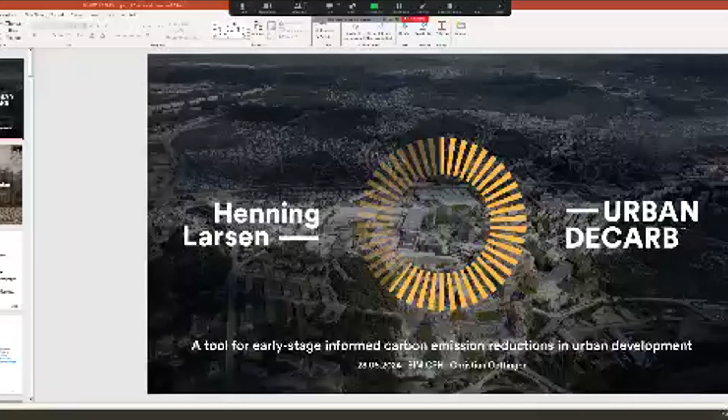Yeah, so my name is Christian Oettinger. I'm a design engineer here at Henning Larsen in the R&D team here at Vesterbro in Copenhagen. I've been here for roughly around 3 years, where this Urban Decarb tool has really been one of the things I have been working a lot on over the last couple of years.

So thank you for joining this session, first of all, on the Urban Decarb tool. And I think I will dig into the details and all about Urban Decarb, but here in the beginning, I'll just give a very brief introduction to what Henning Larsen is, if you don't already know it from David.

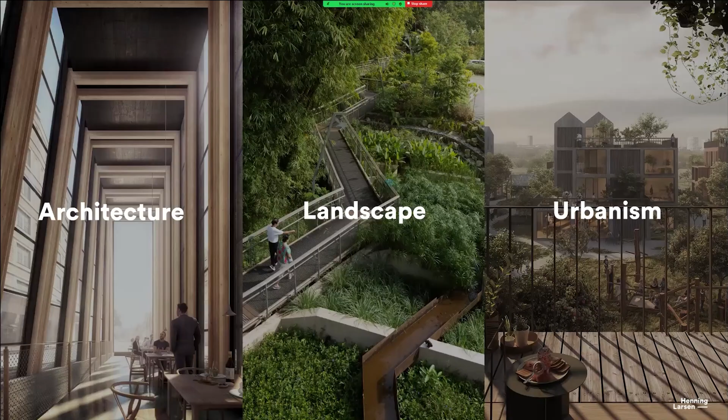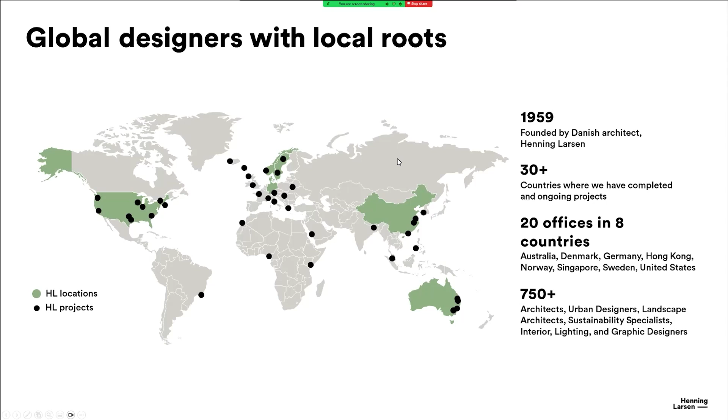So Henning Larsen is an architecture, landscape, and urbanism studio. It's a global studio founded in 1959 by Henning Larsen. And it's global in the way that we have more than 30 countries where we have completed or ongoing projects. And then at the same time, as you can see with the green ones here, we also have offices all over the world.

We're also part of the Ramboll Foundation, and that is important in this case with the Urban Decarb tool here, because that's really why we can even develop a tool like this. First of all, to get the funding, the hours to develop the tool, but then second of all, also to harvest all of this information, all of this data, and all of this expertise from all the people within Ramboll when it comes to all different engineering services that you need to integrate into a tool like this one.

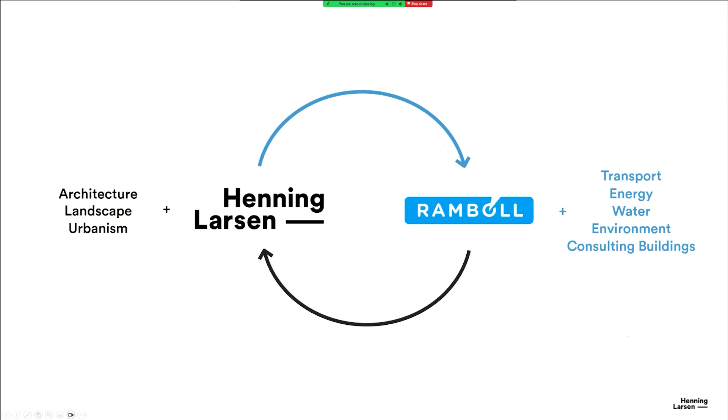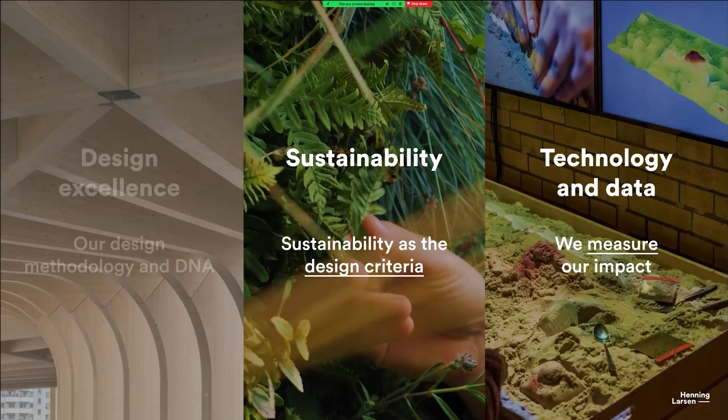Then in Henning Larsen, we have these 3 kind of design topics, design KPIs: first of all, design excellence, sustainability, and then technology and data. As I'm sitting in the R&D and more on the engineer side, I will focus on these 2 here today, about using sustainability as a design criteria, but then also how to measure our impact with technology and data.

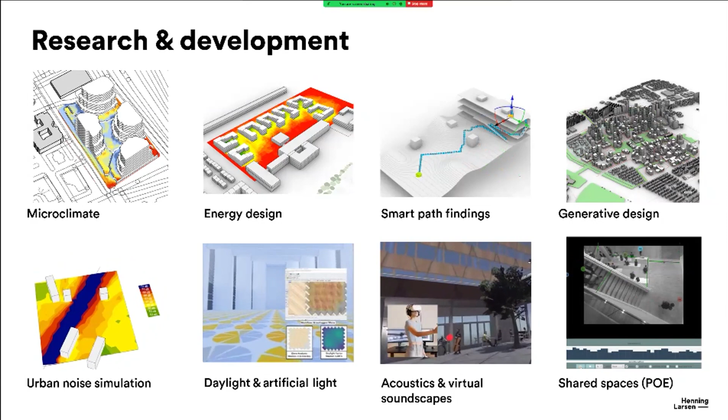So here's a bit about how we work and what we have developed in the R&D team over the last couple of years. It's everything from tools that can run microclimate, energy design, generative design, noise simulation, daylight, acoustics, etc. We have this kind of experience in developing tools or using already existing tools on projects here internally in Henning Larsen.

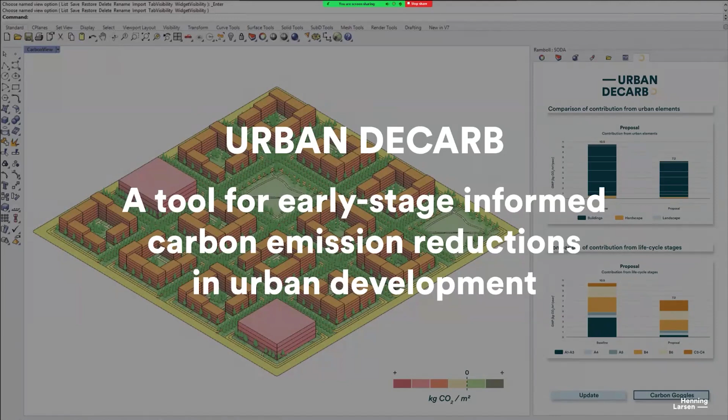And then the latest one of these is the Urban Decarb tool. So in very short, Urban Decarb is a tool for early stage informed carbon emission reductions in urban development. I will try to keep this introduction on why we even built it in the first place short, because I think it's important to explain why we're trying to create tools like this.

First of all, there's going to be a lot more people in cities in the future, 2.5 billion more compared to now, by 2050. At the same time, cities are responsible for a large part of all of our global carbon emissions and a large part of all of our natural resources. And that's why Antonio Guterres, the Secretary General of the UN, said that cities are where the climate battle will largely be won or lost. So that's kind of setting the scene for why we even started creating this Urban Decarb tool.

There's also something about there starting to be a lot of regulations, LCA, carbon assessment, putting in limit values. As some of you may know, last year Denmark introduced LCA requirements and limit values into our building regulations. Actually, a few weeks ago, they made them even more strict from next year on. And if we look at other countries, especially here in the Nordic region, other countries are also starting to implement similar building regulations.

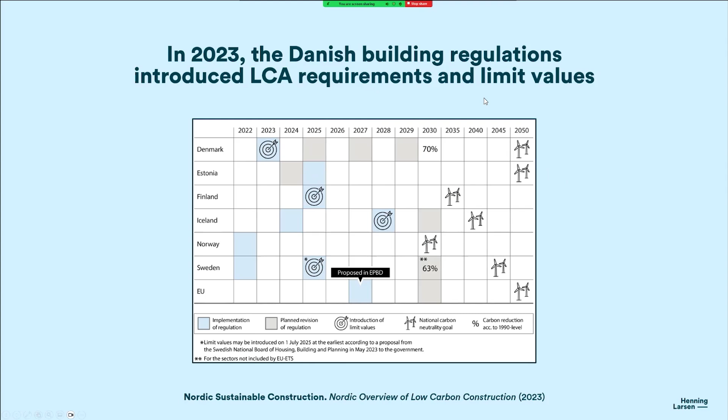Then there's also, of course, the mobility behavior of cars and public transportation, and then below ground also utilities. So instead of only looking into LCA requirements for buildings, we're actually trying to extend the scope and include more categories into the urban scale carbon assessment with the tool.

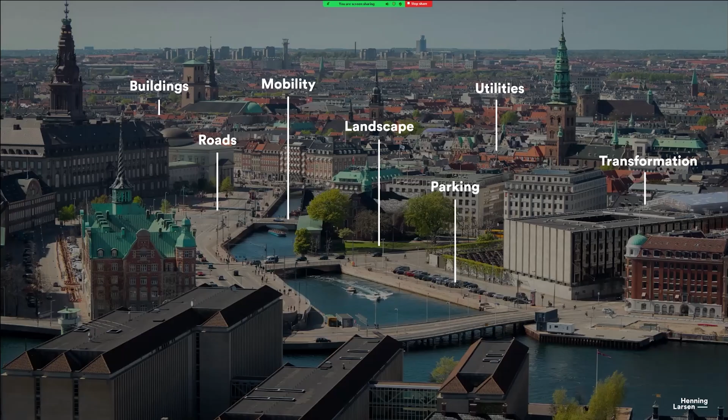So that's the overall goal of Urban Decarb: to make carbon emission data available for informed choices in early stage urban design, in order to minimize the environmental footprint of projects.

In order to do this, this Urban Decarb project has been a research project where we have tried to create a methodology, because there is no common methodology for urban scale LCA as there is with buildings. We have listed these research questions here.

So the first one is, what are the most carbon intensive parts of urban areas? Because when you work on such a scale, it's really the law of the big numbers, trying to figure out what are the most intensive parts first, and then we focus on that, and then include all the other stuff afterwards.

Then it's about where we can actually find all of this data for the urban elements, because if you have ever worked with any kind of LCA assessments, it can really be tricky to find the data. So that has been one of the challenges with this project. And then in the end, how can we actually use this to then design?

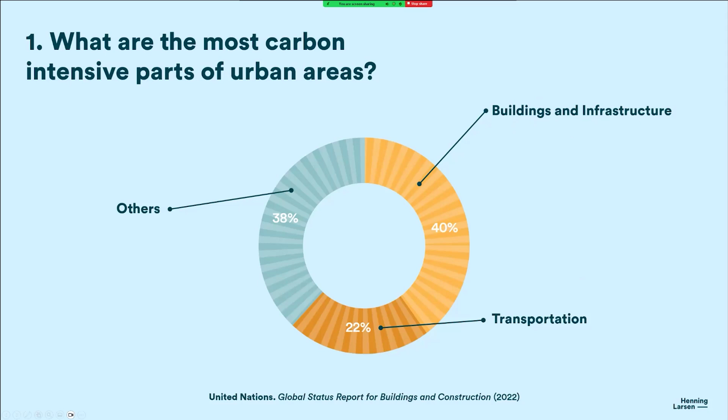So starting with the first question, what are the most carbon intensive parts of urban areas? We looked into this global status report for buildings and construction by the United Nations, where they took all global carbon emissions and divided them into sectors. Very overall, they divided into three sectors: 40% of all global carbon emissions comes from buildings and infrastructure, then 22% comes from transportation mobility, and then there is this 38% from others.

And if we dig a bit more into what it actually includes, for buildings and infrastructure, it's both the embodied carbon emissions as well as the operational carbon emissions. It's everything from all of the building materials, hardscape materials, landscape and green area materials, and then infrastructure materials. And then on the operational carbon, it's both the building energy, but also the public energy around.

And then there are also the mobility carbon emissions coming from both the daily mobility where you drive around or take a train and use some fuel or electricity, and then also the actual vehicle manufacturing that's included in this category. And then there is this whole others, quite broad category, which includes both food and aviation and what clothes you're wearing, what TV you're buying, etc.

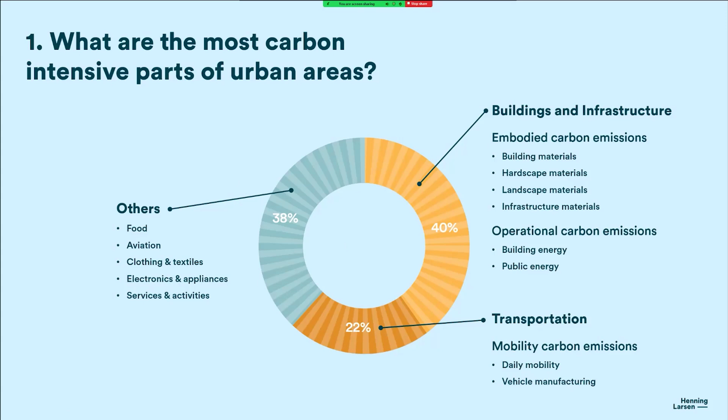And when we started out this project, we tried to set our scope and figure out where we could really make a difference when we did these urban master plans. So we said that our sphere of influence as urban designers is really on this buildings and infrastructure part and on transportation, and that is what is within the scope of the Urban Decarb tool and what we're trying to really integrate within this tool.

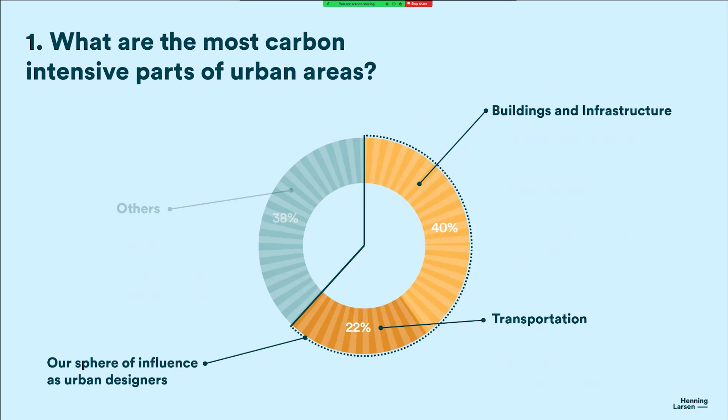And then we took these two sectors and divided into a few more categories. So first of all, the category called buildings, both on materials and energy, but then also the open spaces, everything from roads and sidewalks to parking and green spaces and parks. And then all the stuff below ground, all the networks that goes into, for example, all the buildings, including electricity and water and district heating. And then the category called mobility.

As you can see here, there are some of this we actually got quite far with already in our tool, which is fully implemented within our Rhino Grasshopper workflow, which is all on the buildings or open spaces. Of course, it can always be more detailed, but we got quite far with this. And then we are working quite intensely on integrating networks and mobility in the tool, and already figured out a methodology, and now just trying to see how we can actually implement it.

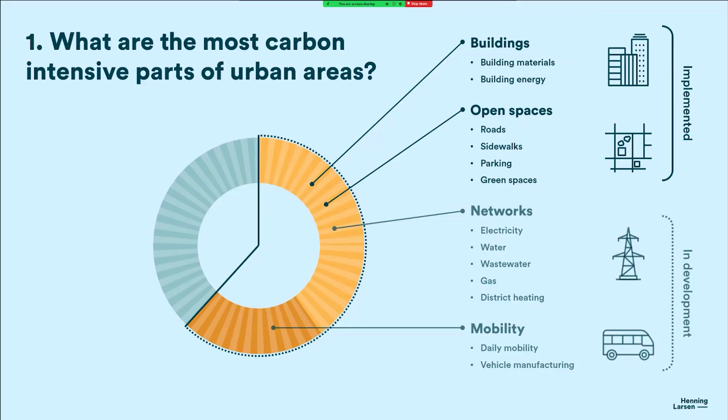Then next question: so where can we find the carbon data?

If we look at the same categories as we saw before, when we prototyped this tool, we have been working specifically for Danish projects, and that's also where we have used the project or the tool the most on projects. So for the buildings, we have looked into Danish EPDs as well as the Ökobaudat database, which is kind of like the standard in the Danish building regulations.

And then for the open spaces, we have dug into this database called InfraLCA, which is made by Vejdirektoratet, the Danish road directorate, where they created a database for LCA numbers for all different kinds of infrastructure elements. And then we're also using this database called Climate Positive Design in order to figure out carbon sequestration rates, for example landscape and trees and stuff like that.

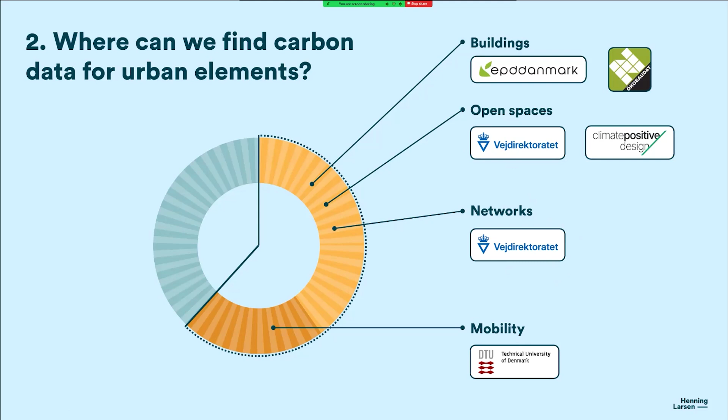And then if you look at networks, that's also something where we're looking into InfraLCA and using the same database here. And then for mobility, we are looking together with Ramboll's mobility department into various kinds of transport survey data sets, for example one which is made in Denmark specifically by the Technical University of Denmark. So that's overall where we get the data from, and I'll be a bit more specific on how it works a bit later.

So then there's also the question about how we actually estimate this urban carbon footprint, and we're using this methodology which is called bottom-up LCA. Essentially what bottom-up LCA means is that the sum of the carbon footprint of the urban area is the sum of all its elements and various parameters that go into the urban area. The urban area here consists of some mobility, some networks, some open spaces, and some buildings.

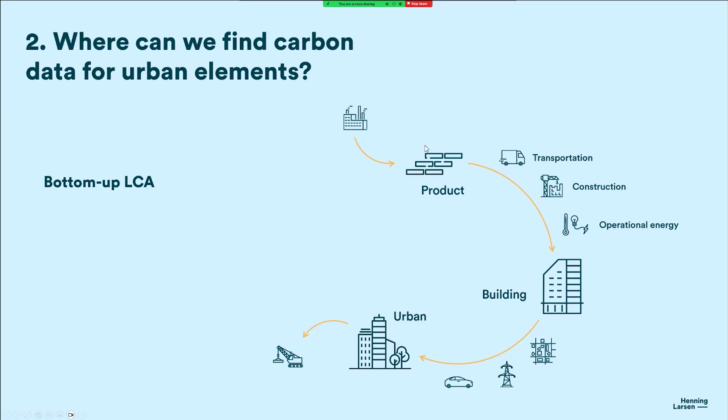And then if we take buildings as the case, then all of the buildings consist of some operational energy, some construction emissions, some transportation, and then a bunch of products which we can find EPD and data sets on. And if we take all of this up, then we can actually find the total urban carbon footprint, which is the sum of the impact from each of its elements.

And that also means that when you work with it here and you sit and choose between different scenarios and different materials, the carbon footprint is actually directly determined by those design changes that you make. So for example, if you change a facade or you edit your window to wall ratio, or you make your building slightly taller, then it will directly influence the quantities and therefore also the total carbon emissions.

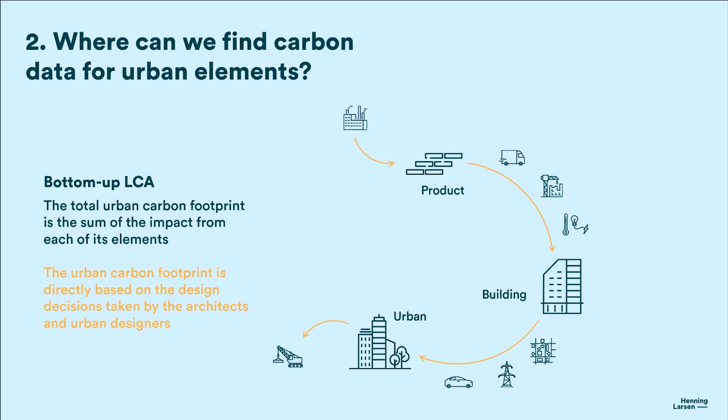This is a sketch of the overall workflow for how we perform the LCA calculation. First there's a lot of quantity extraction, figuring out all the quantities, and then we match that with a catalog of standard components.

Starting with quantity extraction, we're using a parametric workflow in Rhino Grasshopper, where you've often created building massing, volume, urban models where you do your roads, landscape overall, and buildings.

We're running a simplified quantity extraction, meaning there are direct and indirect quantities. Direct ones could be directly finding the area of the ground floor or roof. Indirect ones are, for example, getting the facade area and inputting a window-to-wall ratio to get your window area. That's the simple quantity extraction we built in this Grasshopper workflow to estimate everything from the building massings.

For the structure, which can be difficult to estimate this early in a project, we're using a tool created by Ramboll Finland called Phoenix. What it does, and I'll show the tool in action later, is take your building and split it into floors, then run the geometry and lay out the grid.

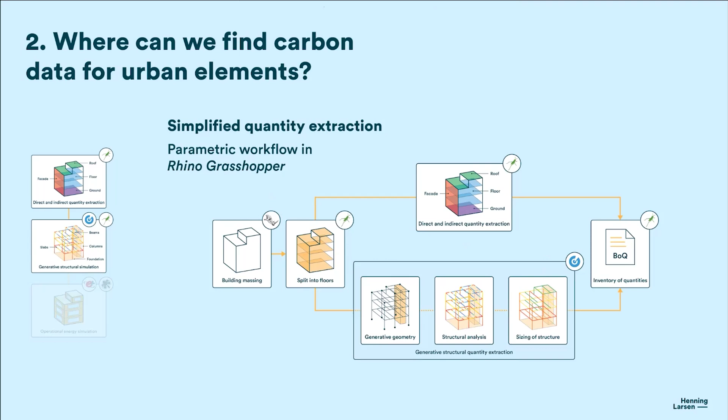Then it performs a structural analysis and sizes your structure depending on very simple inputs such as your building massing and a few details on materials, typology, loads, and so on, then runs through all your buildings and estimates the structure.

We're also running an operational energy simulation using a tool called Dragonfly, which is part of the Ladybug tools integrated into a lot of Grasshopper workflows, and we're utilizing that for our operational energy simulation.

There are a few simplifications when working on an urban scale like this, because running a simple energy simulation for just one building can be very time consuming, taking multiple hours. In this case, we want to get immediate feedback, or at least as fast as possible.

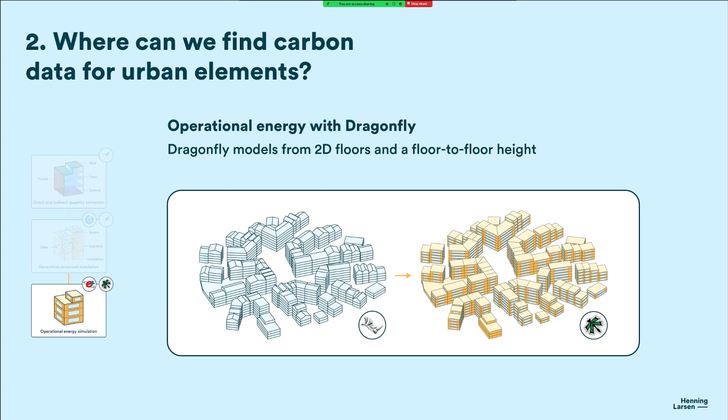Dragonfly models all your buildings from 2D floors and a floor-to-floor height, so it can't take into account steep roofs - it just finds an average height of the top floor. It also models the window-to-wall ratio as one large surface. So there are simplifications, but instead of an 8-hour energy simulation, we can do it in 5 minutes on a project like this.

Once you've found all the quantities and run the energy simulation, we use what we call our catalog of standard components. Normally in building LCAs you'd go in and define your insulation, final facade material, interior material, etc. In this case, we created a component catalog consisting of generic buildups.

We took inspiration from this example library for LCAbyg, created by Build, the Danish institution that also created LCAbyg, the normal LCA tool for buildings. We took inspiration from that, modified it a bit, and created this component catalog.

As you can see here, there are 7 different types of exterior walls you can choose from, same with columns - you can choose from various structural systems and slabs. For roads, infrastructure, and landscape, you can choose from 7 different roads and a few types of lawn or intensive landscape. So we created a whole catalog.

This catalog is then matched with all of the LCA data. So when you click on a timber frame wall, you get the actual carbon footprint of 1 square meter of that wall, depending on the LCA settings you set at the beginning.

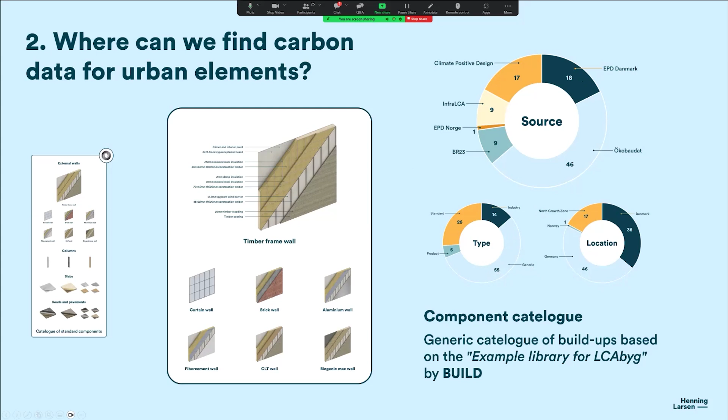Since we're working at these really early stages of urban design, we're focused on finding as much generic data as possible, because we don't want to be specific about products or choose manufacturers. So we're working with generic data from EPDs and from Ökobaudat, as I explained earlier.

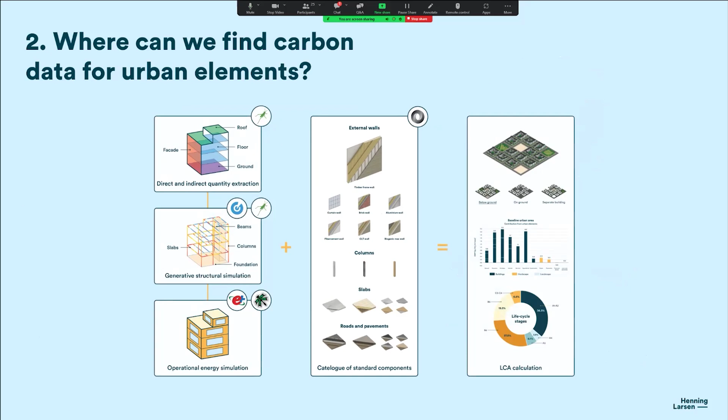Once you have defined all of that, then you have your urban carbon assessment where you can do all different kinds of various scenarios. And then in the end, how can we actually use this carbon data to design urban areas?

Maybe you've seen this kind of graph before, but it shows the design stages that a building or an urban area goes through, from setting the brief to making a concept to a more developed design. The decisions you take really early on really define a lot of stuff later, and it's also what defines the environmental impacts.

So the idea of the Urban Decarb tool here is not to be any kind of documentation tool. It's all about being a design tool for urban scale estimations. So we're working with these two design stages, as you can see here - primarily LOD 1 and LOD 2.

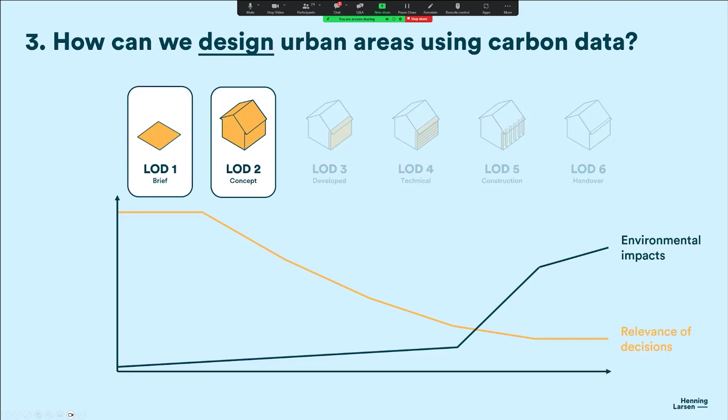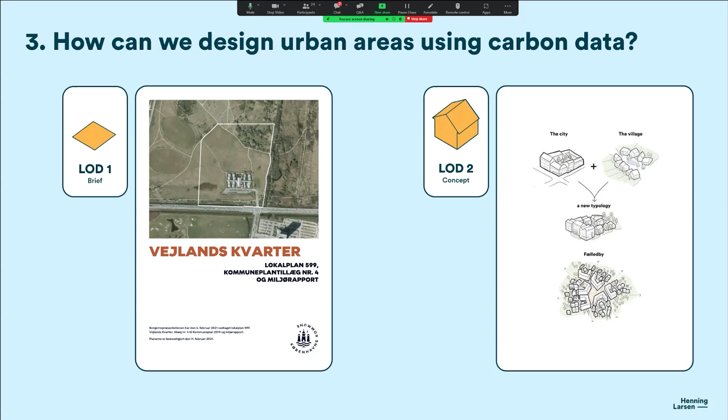You can see an example of what that implies here. For example, the Fælleby project in Copenhagen, where we did the master plan on this side. So LOD 1, the brief, would be the local plan they did for the area, and LOD 2 is where you actually do the volume massing, set out your roads, and design your buildings in 3D.

As it stands right now, we actually created two, not different but similar, tools for that, and today I'll focus primarily on the Urban Decarb tool, because it is this 3D software we integrated into Rhino and Grasshopper for architects and urban designers.

But I also want to briefly introduce this other tool we created called Plan CO2. Plan CO2 is a tool we created for municipal planners in QGIS, this open source GIS software where a lot of local planners work to do their cards etc. for local plans.

We got funding from something called Plan 22 Plus, which supports and helps create and broaden knowledge and tools around how to work with climate assessments and physical planning in the Danish municipalities.

It's also a focus of Plan 22 Plus that everything is open source, which means the entire code and tool for this Plan CO2 is going to be fully open source once we release it in a few months after the summer break.

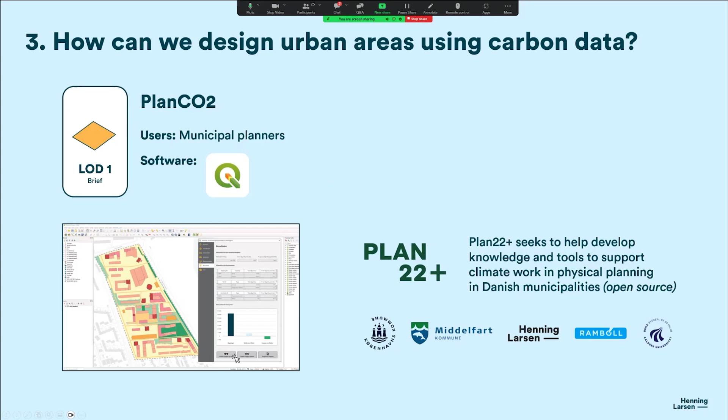It's something we have developed together with the municipality of Copenhagen and the municipality of Middelfart. When I say us, I mean Henning Larsen and Ramboll, and we're also supported by BUILD to quality check it.

The way we actually developed this tool is that we took our Urban Decarb tool, which is in Grasshopper, and put the entire tool into Excel, which seems like quite a job - and it was - but it was a requirement by the municipalities that they should also have some kind of Excel database they can sit and work with to see all of the formulas behind it.

Once we had this huge Excel sheet, we made it into a Python script, and that's what we then, together with the GIS people in Ramboll, implemented in QGIS, as you can see here.

I think what we're realizing more and more as we did this code and built this tool is that maybe Urban Decarb is not necessarily our Grasshopper tool, but instead the code we have now written into Python, because we want to create this Rhino plugin for architects and urban designers to use it even more simply.

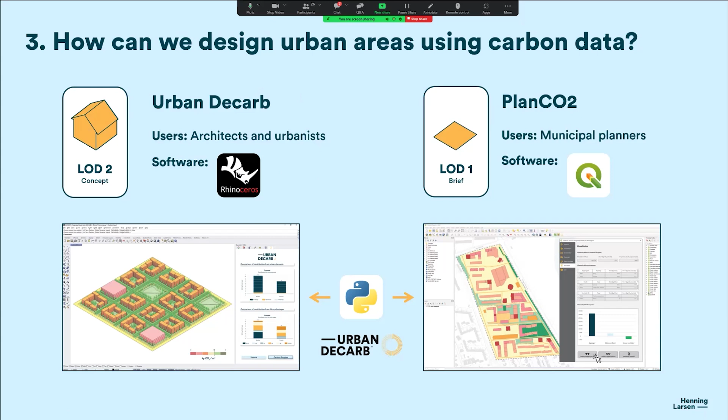Of course, it needs to be written into C# and there need to be some edits. But essentially, we want to see if we can create this plugin that can then be put into both Rhino and QGIS.

And why do we want to do that? Because we want to make it as easy as possible to perform these urban carbon assessments for architects and urban designers - we want to give them the tools so they can work with it themselves and see what changes and what the changes impact in terms of the carbon footprint.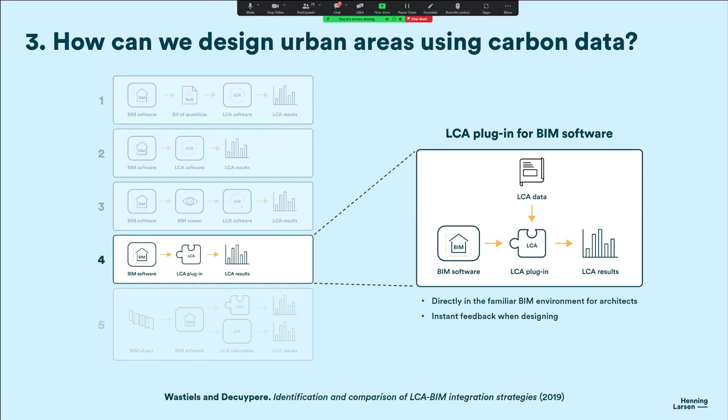And that also means that the actual tool works within the familiar BIM environment for the architects and urban designers. They don't have to open up another software or anything like that. And that also means at the same time that they get this instant feedback when designing, if they can use the Grasshopper tool, which some of them can.

And this is kind of like the overall look of how the Grasshopper script works. I will not dig too much into this one. I think I'll show the script instead and how that looks, but it's just to show that there are all different kinds of tools and software that go into creating this tool in Grasshopper—everything from just using pure Grasshopper scripting to this Ramboll FENIX tool, to Ladybug tools, etc., and then also importing JSON format materials.

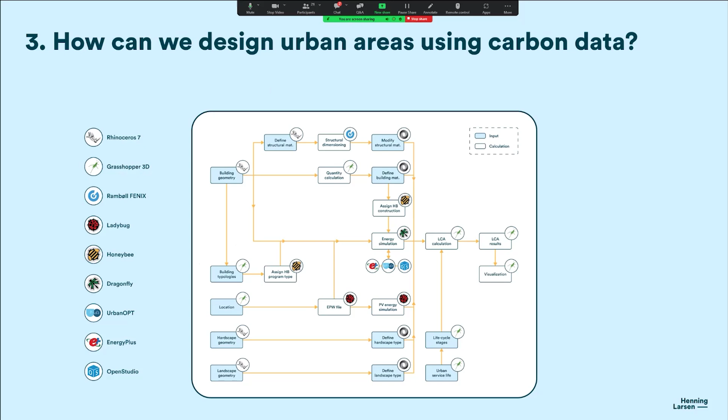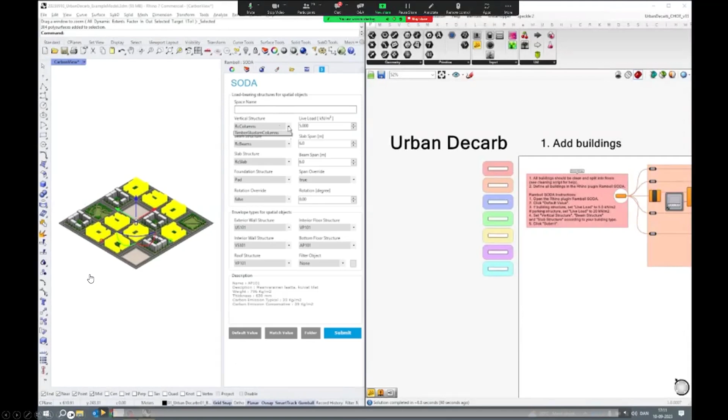So here is the actual tool, which I'll just show, and I hope the video is good to see. I'll just pause it in the beginning. So what you do is that you actually start by drawing out your entire urban area, and you can create various scenarios for that.

And then the first step is that you define all of your structure. That's kind of the first step in the tool. So you define, for example, for some of your buildings, these ones are in timber, and they have a load based on their typology. And then you select some other buildings and choose concrete instead, and maybe it's a different typology, so you have a different slab span or different loads. That is all based on the typology.

And then you define all of your buildings, as you can see here, and then you start running the actual script.

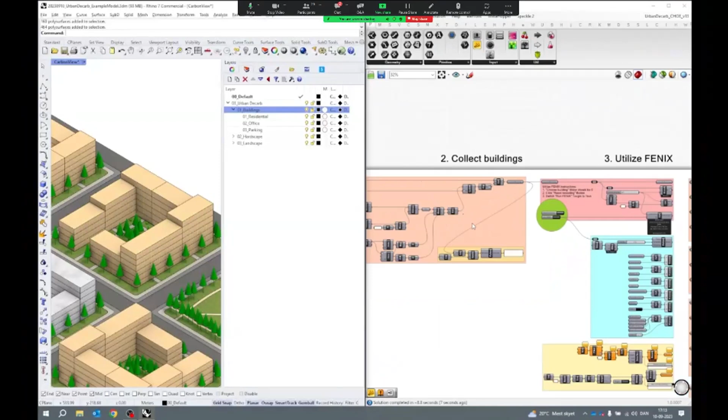And then what FENIX does, as you can see in the video here, it runs through every single one of the buildings just based on the structure, the typology, and the massing, and then generates or estimates this structural system. It goes quite fast—of course the video is slightly sped up, but it takes like one minute for it to run these 12 buildings, as I think it is here.

And then you can see all of the structure, including also basement. So of course it's an estimate, but it's quite a nice one compared to if you usually use per square meter. Then you can change a bunch of LCA parameters, as you can see here.

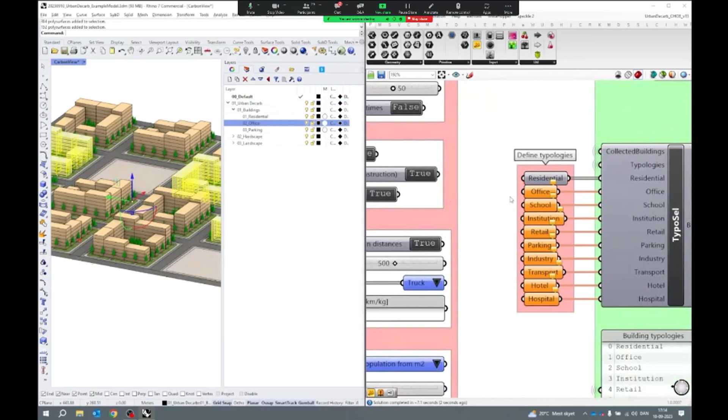You can change what life cycle phases you want to include, if you want to look at 50 or 60 years, etc. And then you go in and you define all of the typologies for your various buildings.

And then afterwards, you can go in and you can first of all see all of your areas for your typologies, and you can also see what population that then estimates would be in this area. And then you can of course override that.

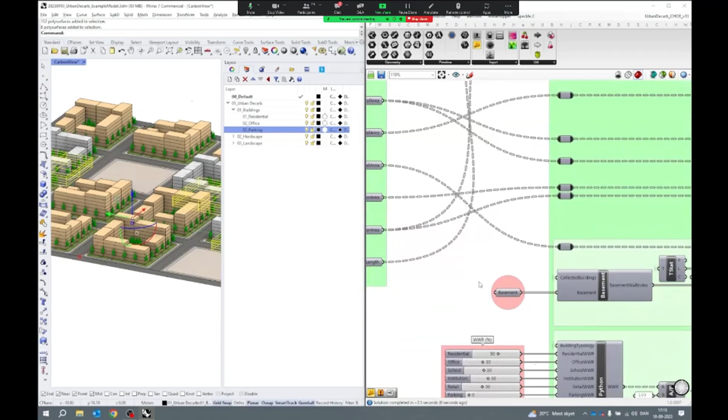Then you can define if there is any basement, and you can also define the windows-to-wall ratio based on various typologies. Then if you have any transformation, you can define transformation or renovation of existing buildings, and then it will import all of this LCA data here.

And then once you have done that, it's time to define all of these various materials here. So what you can do is define a default for all of them, and that will be assigned to all of the buildings.

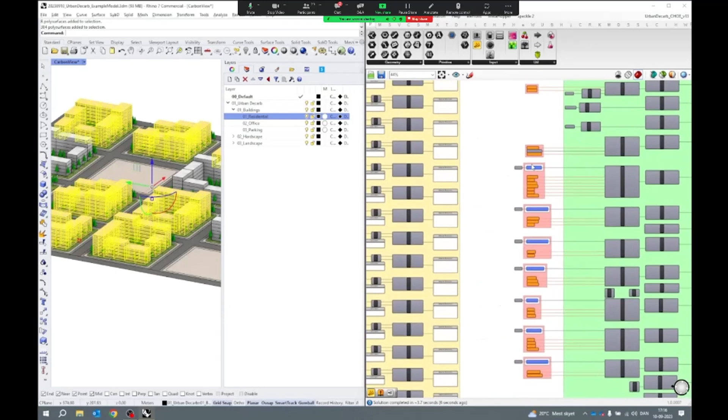And then once you have done that, you can go in and select your various buildings, and then say I want this, for example, to be timber facade or CLT walls inside the building, and change maybe some of the internal walls. So you can then modify them more specifically if you have selections on some of your materials here.

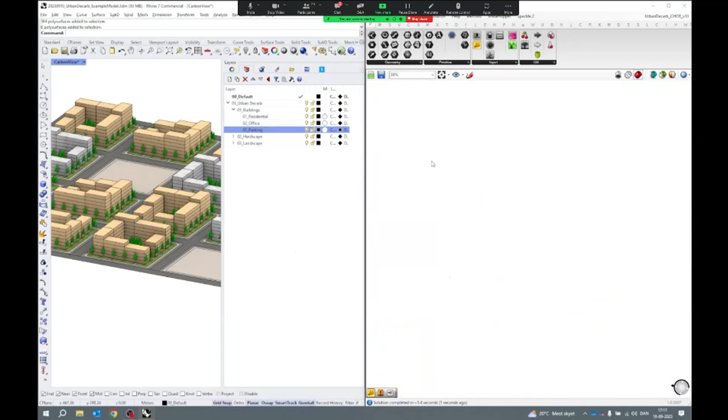And you can do the same, for example, with the parking one. And the next step is—so that was all around the buildings—the next step is all of the roads and all of the landscapes.

So you go in, and in the same way as before, you select various different types of roads. And then, for example, if you have a bike path, that's also a different build-up for the road. So you define that, and pavement and paths, etc.

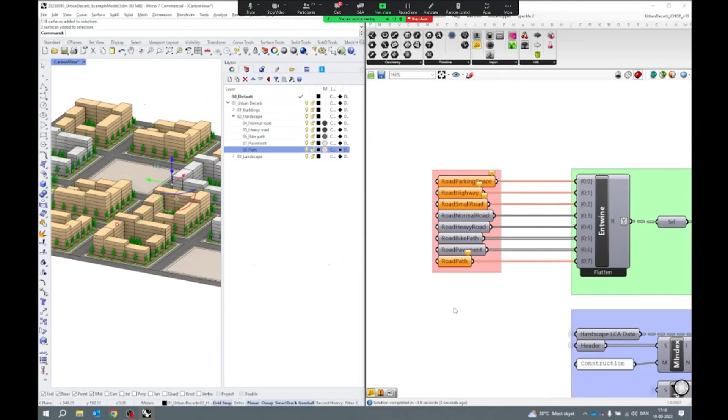So it really helps to have it kind of structured over here in your Rhino file. But these layers are also created when you start the tool in the beginning, so it's easy to put them in. And then you do the same with your landscape—so for example, if you have any trees, if you have shrubs, if you have a lawn, and you can also choose from various types of lawn below in the script.

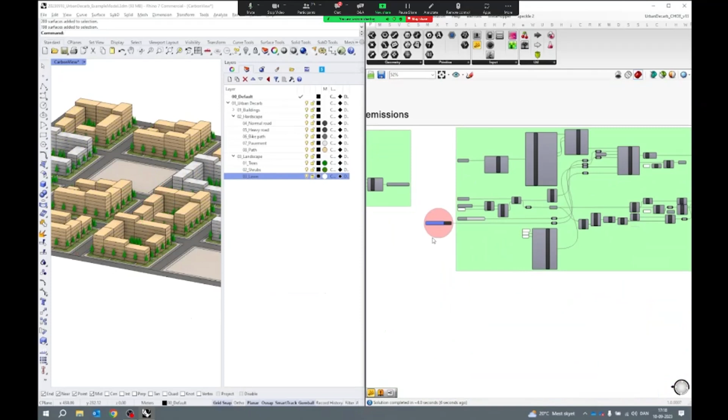The first step it does after defining all of this is that you can run a radiation analysis for all of the PV panels. If you implemented solar panels, it will both include the embodied carbon of the actual solar panel, but it'll then also calculate the energy this solar panel will produce at the specific site, country, or wherever you are, based on shading. And then you can see the energy production that creates.

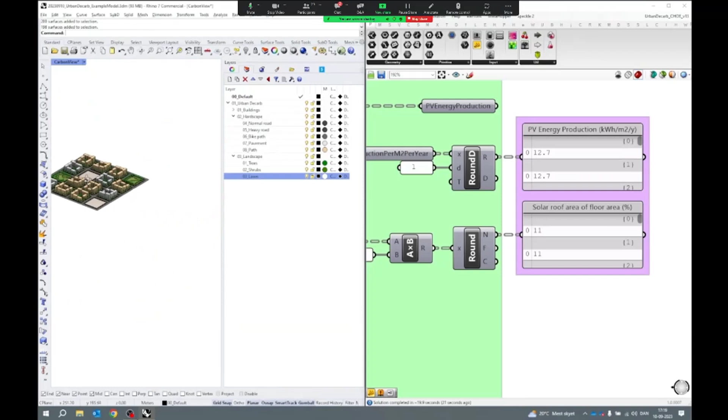The next step is that it runs this energy simulation. It takes a bit of setting up the whole energy model, and as I explained earlier, it's also a bit simplified, with various window-to-wall ratios, and it's all in these boxes instead of having steep roofs if there are any. Once you've defined all of that, you can run the energy simulation.

Same as with the structure, I've sped up for this video here, but it takes less than 5 minutes for an area like this. So it's relatively fast compared to if you run a larger one.

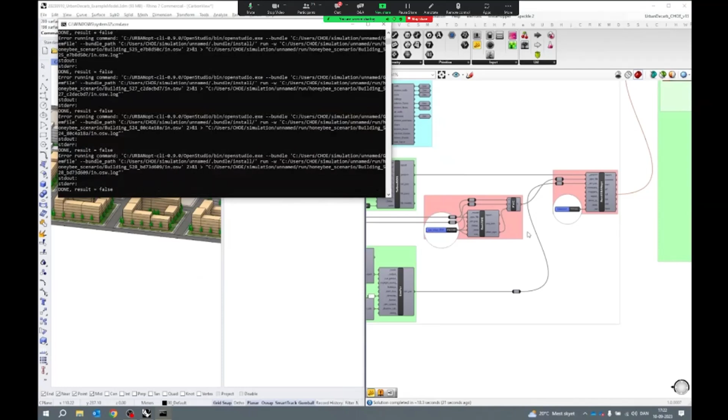Once you've defined the operational energy, you can go in and define whether you have district heating in the area, or if you're using heat pumps, and then it's multiplied with emission factors that are, in this case, specific for Denmark. That gives you a number for the operational carbon for each of the buildings.

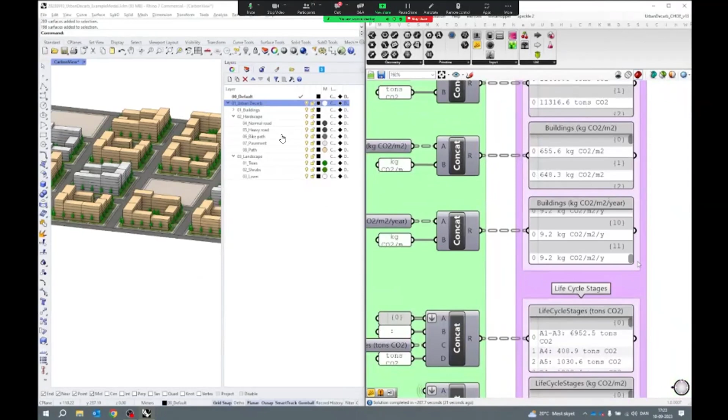Then it comes to all of the results. You can see the results for the buildings per component, you can see it for the complete category, or you can see the total results for the entire area, either per square meter in total or per person.

The final step is that you have these carbon goggles, as we call them, where you can see what are the most emissive parts of your area, and what are the less so, even green if they actually sequester carbon. And of course, that's only one scenario.

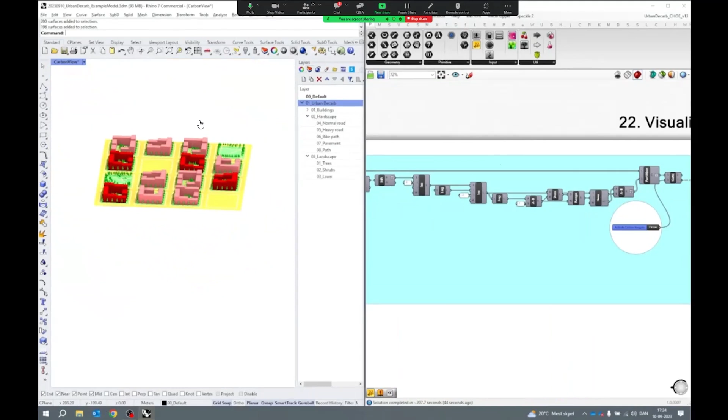If you want to create multiple scenarios and actually compare them, you would have to run this again.

Then there is just a brief overview. As you could also see in the video, there are various design parameters that you can work with.

First of all, you can work with your open spaces and how you define that - if you do a lot of hard surfaces, mixed surfaces, or green surfaces. You can do the same with parking - whether you want below ground parking, on ground parking, or in separate parking buildings.

More specifically on the building size or building scale, you can choose different plot ratios, and you can do your massing in various ways - tall buildings, low buildings, or wide ones, etc. You can also work with the structure, the envelope, and with PV panels. So there's a bunch of various design parameters you can work with within the tool.

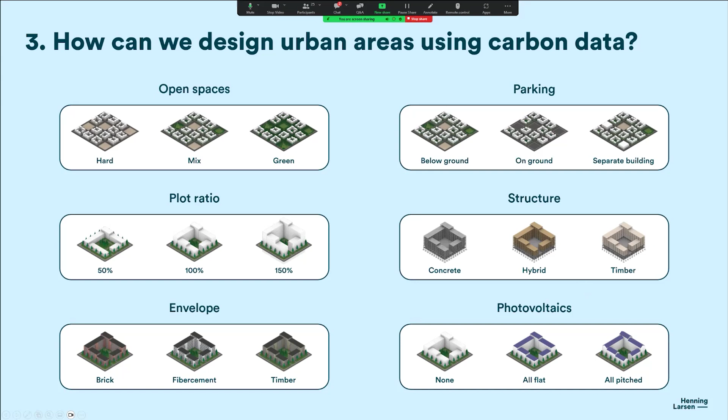Here at the end, I'll just briefly talk about a few projects where we've used the tool. We've used it over the last 1.5 years on around 10 to 15 internal and external projects. One of them is the Philippi project, which I talked about before.

Actually, Philippi is one of the projects where we used the tool after the project was already designed. It's kind of like our showcase project for how we work with the tool. So I'll give just a brief intro to how you actually use this.

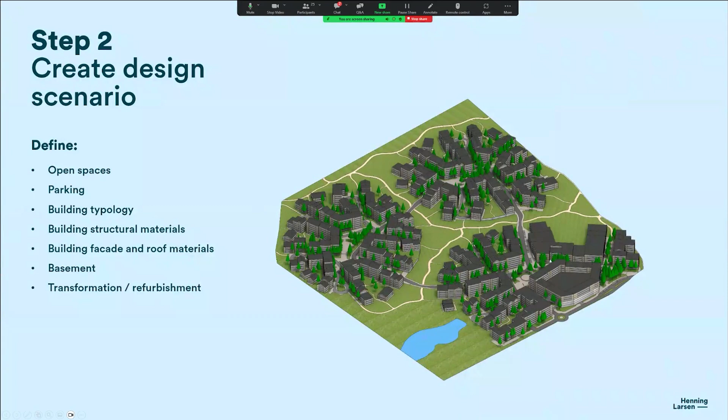The first step you do when you use the tool is that you select the location, as that will determine, first of all, your LCA data. Then you define, as you also saw in the video, all of your open spaces, your parking, your typologies, your materials, if you have a basement, and if there is any transformation from existing buildings.

The next step is that you visualize all of the carbon assessments. In this case here, you can see that there's a lot of lawn and more wild kind of grass area that is not maintained, which means that it actually sequesters carbon.

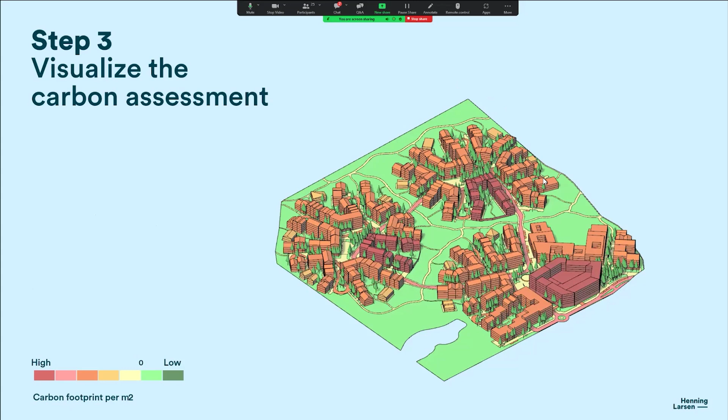Then there are, of course, some roads, and then the buildings, depending on how they are shaped and what they're made of, goes from this scale from low carbon footprint to high. So for example, in this case here, 3 of the buildings have parking, half basements, as you would probably say, in concrete.

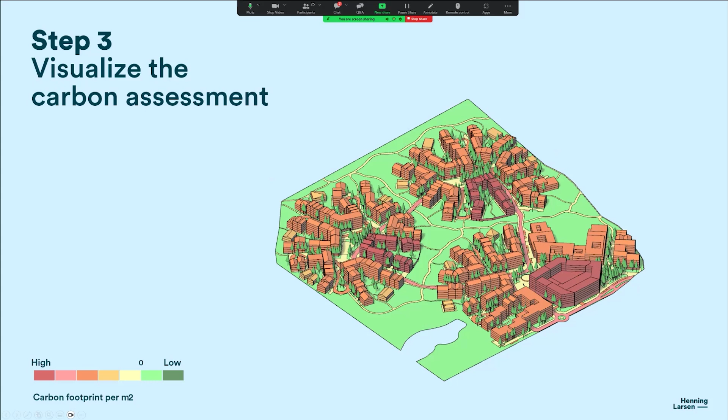That means they will have a higher carbon footprint than at least some of the other buildings around them. When you have created one scenario, that's this one over here, but then you can also do multiple scenarios. In this case here, we compared a baseline conventional design of the buildings, where all of the landscape is the same, but we're just changing the materials of the buildings into more biogenic materials, and we show a 34% reduction in the urban carbon footprint of all the stuff included in the assessment.

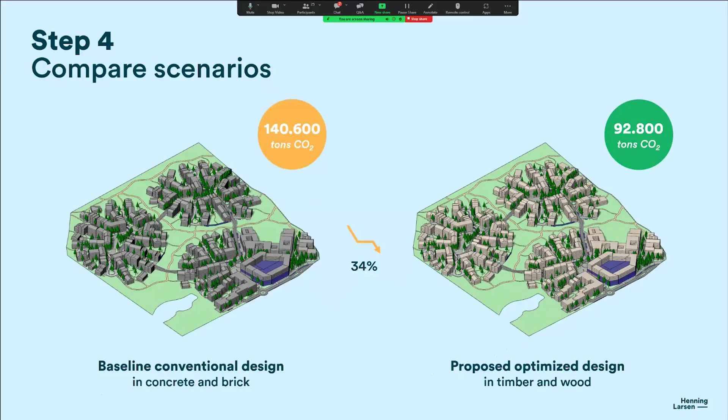We also did a different project in Aarhus, where we looked at this existing site here, which, opposite to the Philippi project, is actually a brownfield transformation. So there are some existing buildings, some existing landscape, and some existing roads and parking. Another use case we found with this tool is that we can use it to show the transformation potential of existing buildings and infrastructure. In this case here, we started by running an analysis to see how much carbon it would emit if we had to recreate these buildings, in order to give arguments for saying we should not just demolish the entire area and build new, but instead reuse some of the buildings and infrastructure, as you can see here.

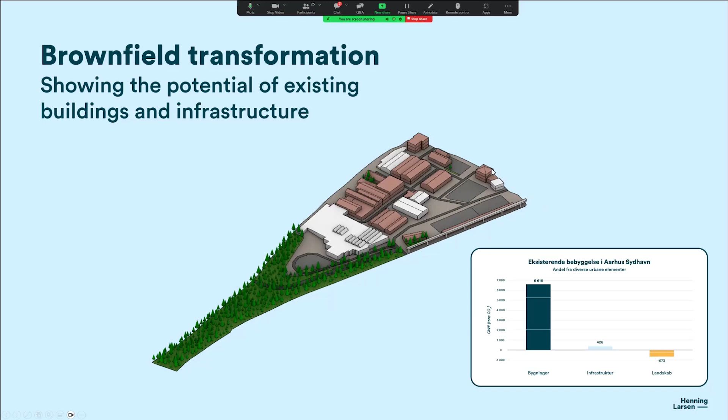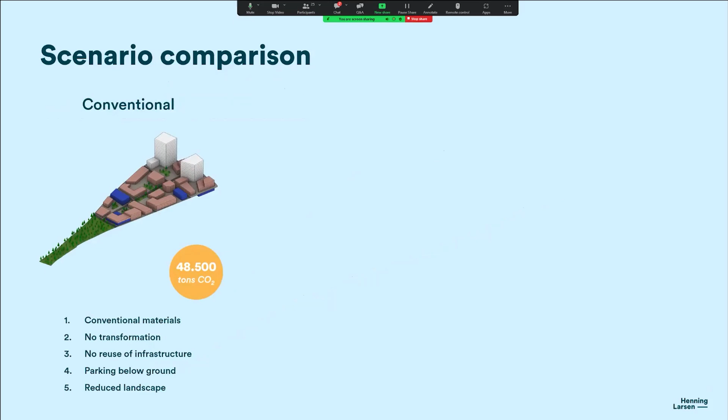Then we move on to what the tool is actually made for, this scenario comparison. The first scenario is the more conventional one, where you get rid of the old road network, build new buildings with conventional materials, do a lot of parking below ground, and maybe reduce some of the landscape. Then we get one number for the carbon footprint.

Then you do another scenario with transformation of some of the existing buildings. You maintain some of the infrastructure, keep all the landscape, and also do parking above ground. That reduces the footprint by 11%.

In the end, you do this final scenario, doing all the same things as in the transformation scenario, but also changing the materials to more biogenic materials, showing this 34% reduction. That's how we're using it actively on some of our projects, trying to figure out what we can twist and change in order to showcase some kind of reduction in the urban carbon footprint.

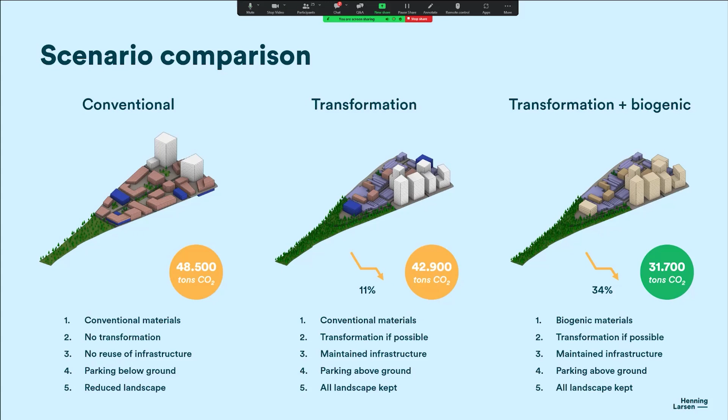And the same with mobility. If you can include mobility at the same time as you're creating parking basements, or creating a bus station or stuff like that, that's also something we're really interested in seeing how we can implement.

As we are a global design studio, we are looking into how we can use this tool in other geographies, maybe in the rest of Europe, but also maybe in the States or Australia, and that requires a different level of data harvesting, as some of these countries do not have the same level of data as we have here in Denmark and in Europe.

And then, whenever we have a project or work with clients, they're asking new questions, and we want to include that too. So we want to continue testing in order to see where and how we should develop this tool.

And that was it. So thank you for listening in. Maybe there are some questions.

Thank you, Christian. Not really, actually. So you have done it well. There was only one hand raised in the middle of the talk. So if somebody wants to talk or have a question, just raise your hand, and I will invite them in to talk with Christian. Perfect, that sounds good. Let's see.

I have a question for you, Christian. If others want to use the tool, is it possible for them to contact you?

The Grasshopper tool is not something we're sharing publicly. That's something we're, at least for now, keeping on our side. The Plant CO2 GIS tool and the code is going to be accessible on something called OS2, this open source platform for municipalities, and it's going to be accessible during the fall at some point. There's probably going to be some press releases, so then everyone can actually use the tool in this GIS 2D version, and also see all of the code behind it in reality, and check it out. So that will be completely open source, but not the Grasshopper tool for now.